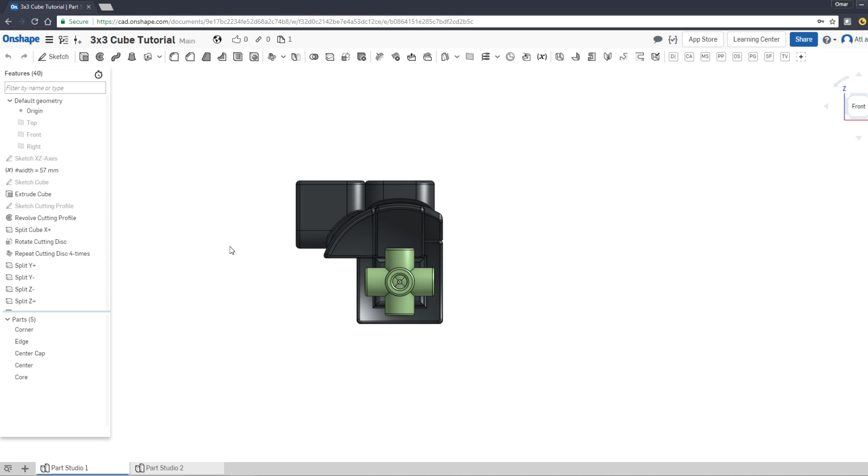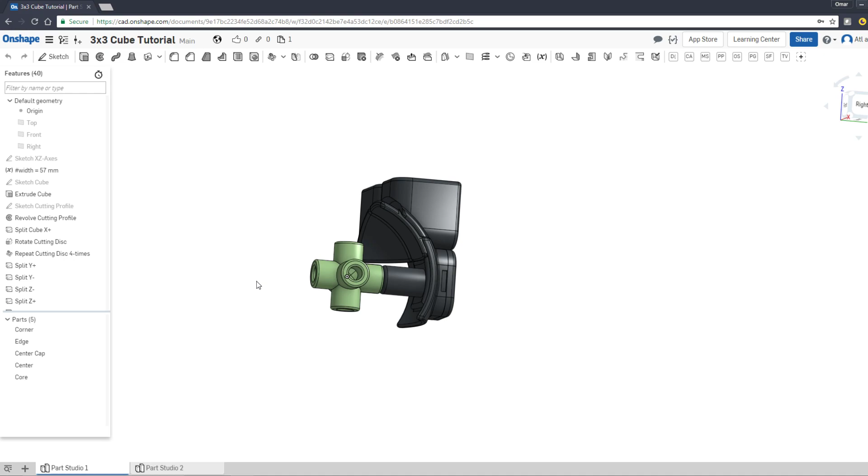The reason I chose this topic this week is because we spent a lot of time talking about Megaminx and Starminx and other dodecahedral type puzzles, and I thought this would be a nice change for this weekend to circle back to 3x3 and talk about this a little more. Then we can always go back and talk about Starminx and other dodecahedral puzzles in future videos.

So in this series, I want to talk about how you can make your own, for example, Fisher cube, or what's called a windmill cube, and so on. Or actually any design of your choosing. You can make a truly unique puzzle that nobody has made before.

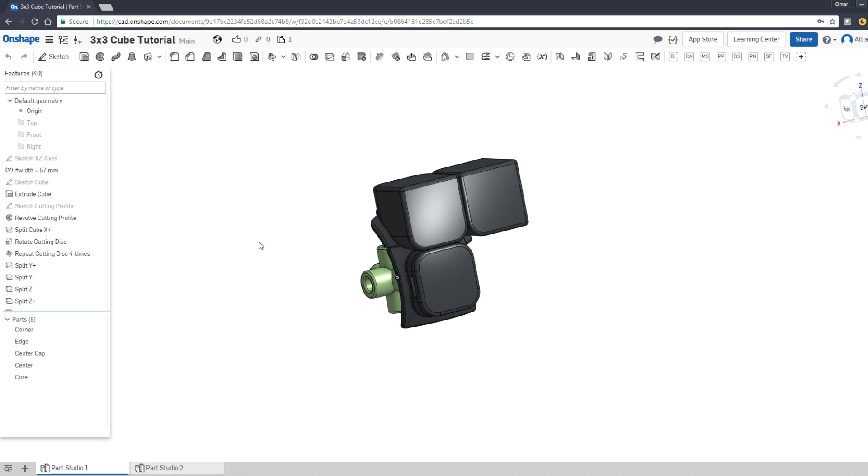It's the same approach, just how the degrees and angles in which you vary the cube differ. So what I want to start with here, I went back to a document I made called 3x3 Cube Tutorial, and this is what we ended up with last time we made the 3x3 tutorial series. There are a few things I'm going to modify in this document, and you can follow along and make those modifications, or I'll make this document available so you can skip those steps, and we can go from there.

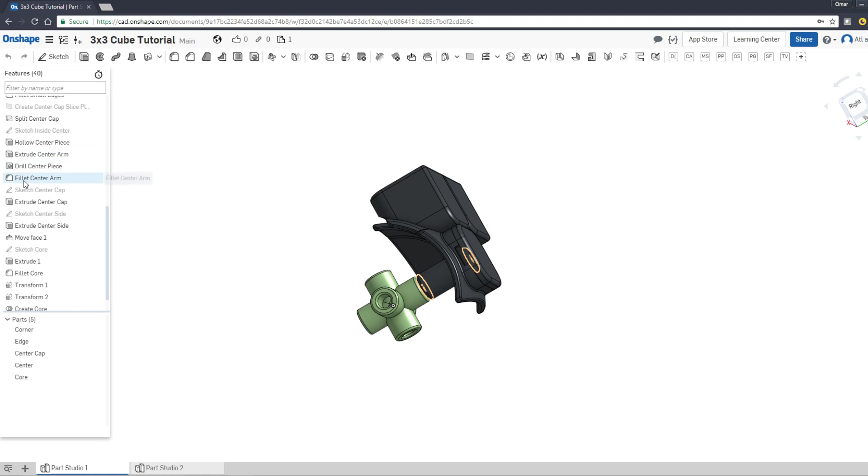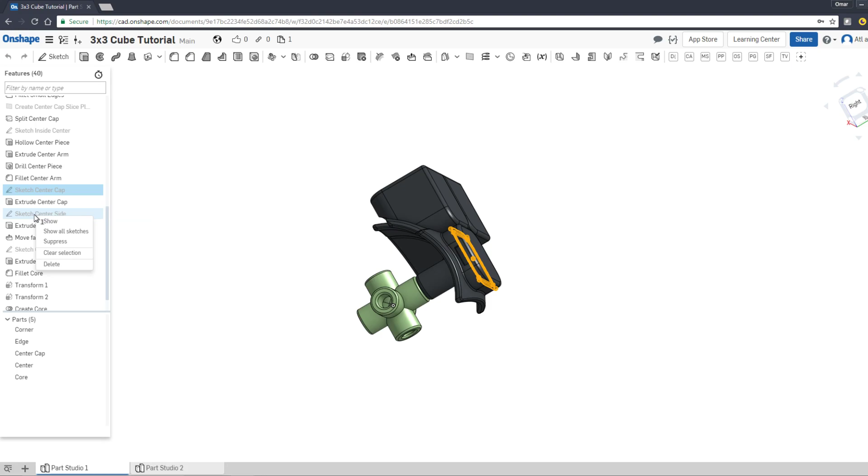At this point we made a sketch here to slice the center cap, and I think we will leave the center cap for now, but I'm not sure about the filleting or this side piece, for example. So I'm going to roll the design back to this point.

Right click and do roll to here. You'll see that the core is gone, which is fine, we don't need the core. You can make your own core, and I'm going to skip all these parts.

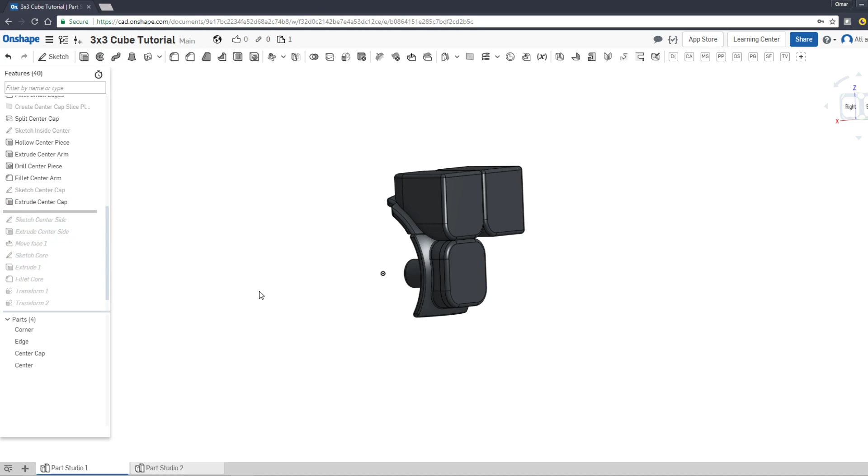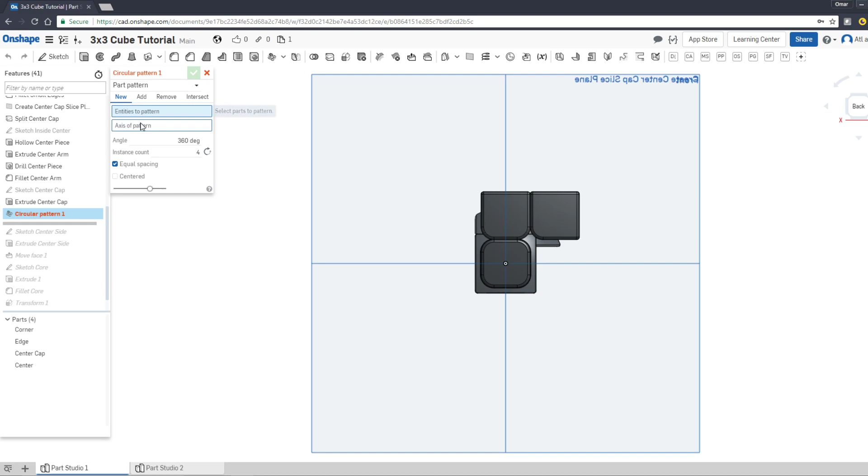The next thing I want to do to prep this document is show the axis, the different planes here. Let's click on circular pattern. Keep this at part pattern, and let's choose the corner and the edge.

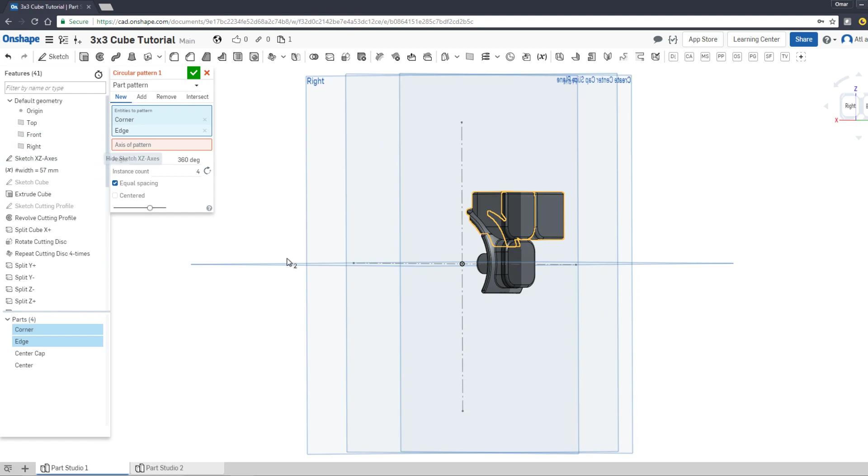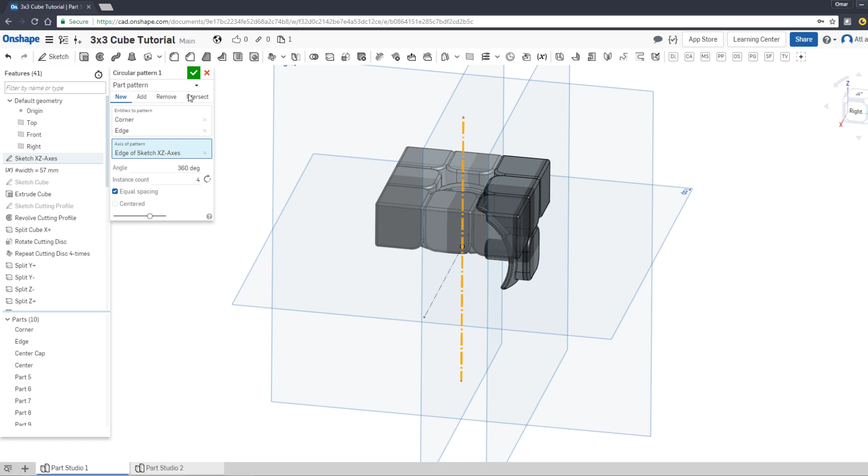For the sketch, I'm going to show my earlier XZ axis here, and let's do this Z-axis, and you'll see how it made this layer here, and do OK. So basically I rotated the corner and the edge around the Z-axis, and it gave me a layer.

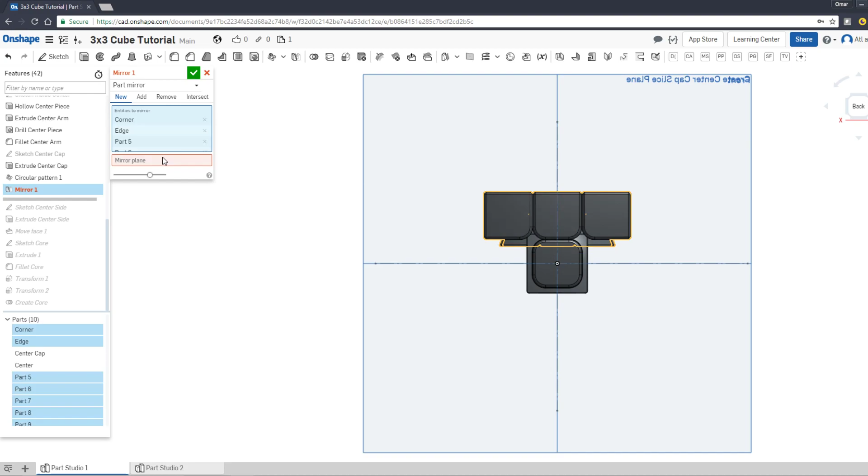Now I'm going to click on mirror, and choose entities to mirror. I'm going to draw a rectangle around these parts at the top, and for the mirror plane I'll choose the top plane, and it should copy them. So now we have that.

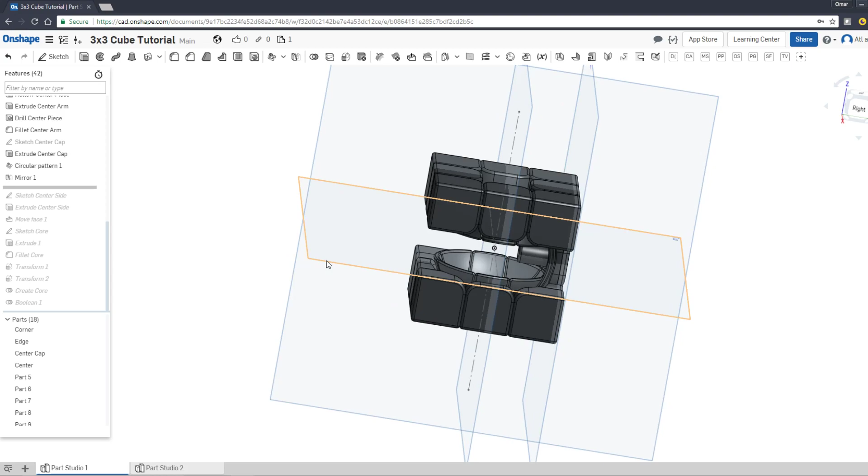Yeah, I don't know, it's very slow today, my computer that is.

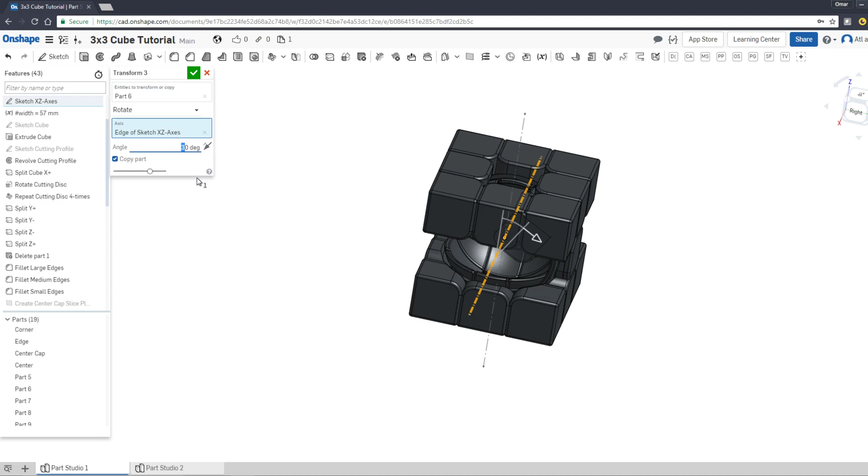Okay, so for the last few things, I'm going to choose this edge, do transform here, copy part, rotate around this axis, and do 90 degrees. There's probably an easier way to do this, we could do another circular pattern and just delete remaining parts, but anyways, I rotated this once here by copying it.

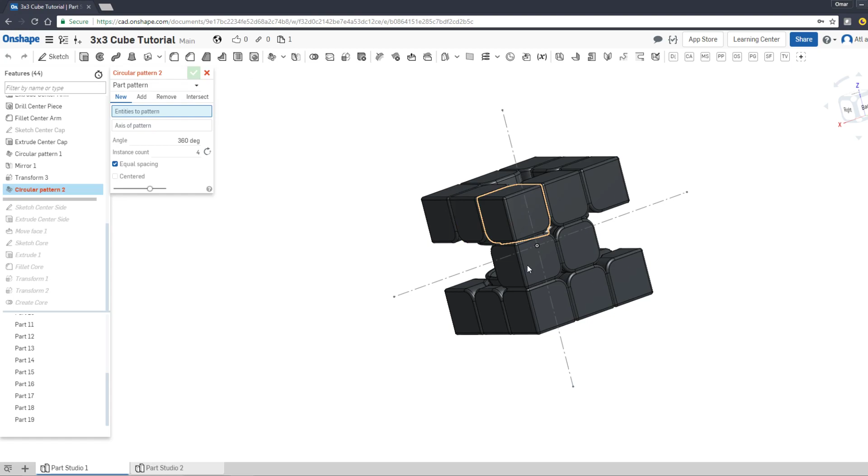I'll choose a circular pattern again, choose this edge and this center cap and the center as well, don't forget the center. For the axis, I'll use this axis, 4 times, and do OK. Oh, I forgot 2 centers. Okay, let's see.

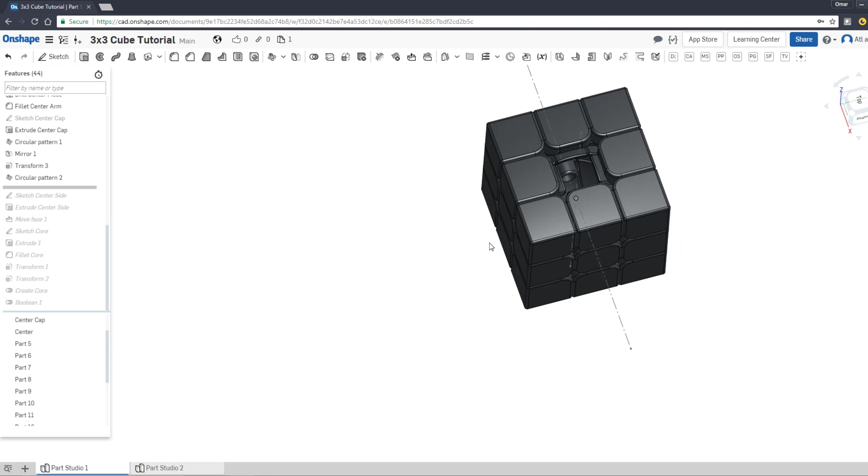Okay, I need to rotate this center again. Yeah, sorry, let me hide these 2 parts.

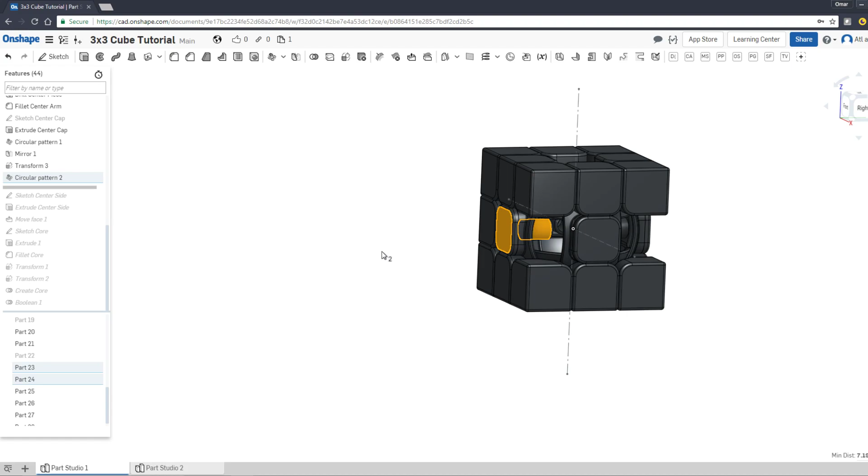Okay, so I'm going to copy this edge, this center cap, and this center, and I'll do copy, transform, copy by rotation, and for the axis, I'll choose this axis and 90 degrees, and do OK.

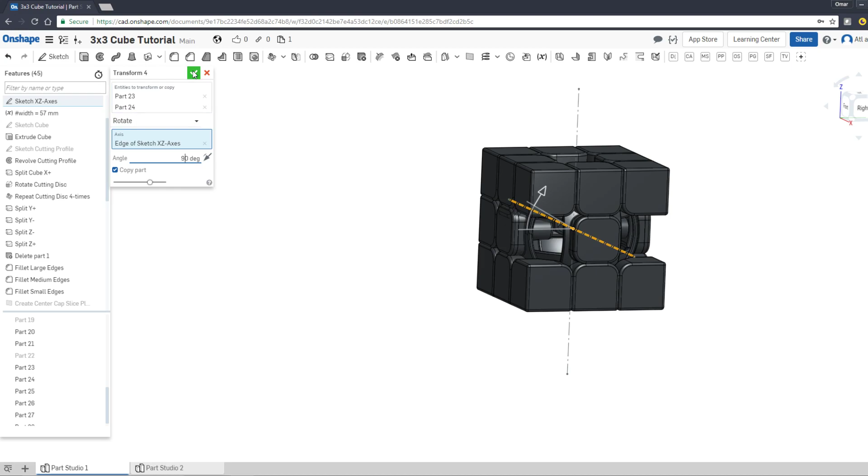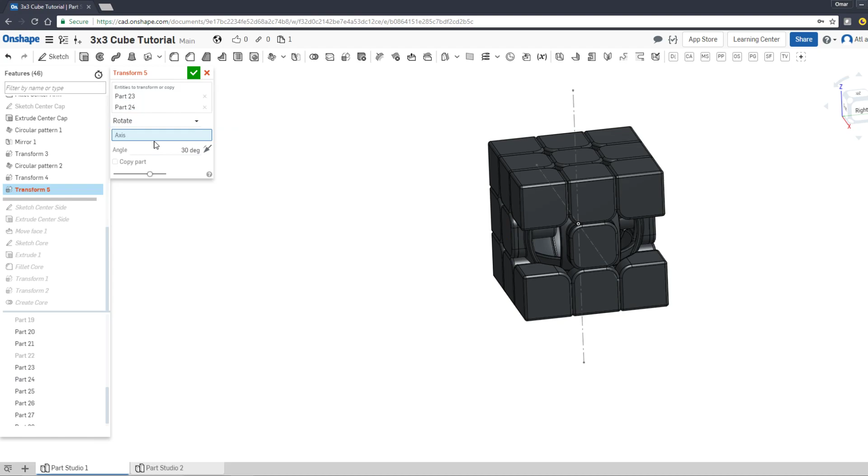Now we have a copy at the top, so I can mirror this. Or let's do it again, actually I'm just going to do the same thing: transform this center cap and this center by rotation along the same axis, again by 90 degrees, same thing.

The only difference now is I'm going to check this and reverse the direction, and do OK. Perhaps there are better ways to do this, but I guess this is okay for now.

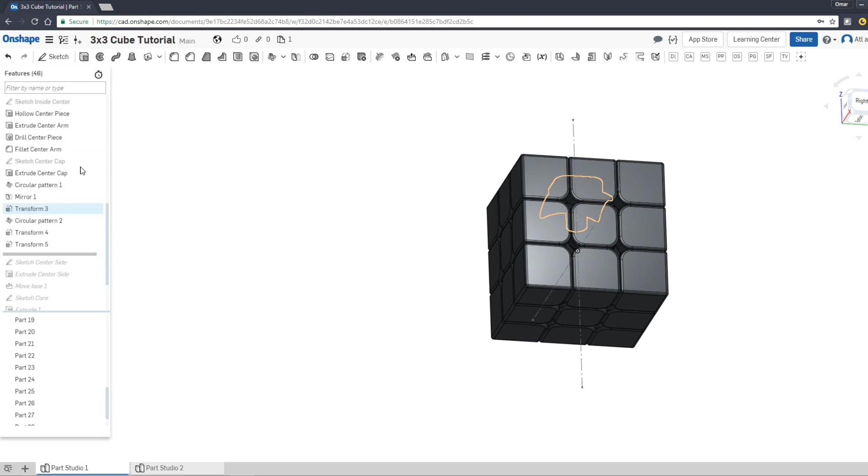Typically, when you make a plain 3x3, you delete all parts except for one edge, one corner, one center cap, and a core. You basically keep a single copy of every unique part. But for shape mods, you need to replicate every piece to have a complete looking cube like this.

Okay, so here it is. And actually, I should have made a copy of this document before I made those changes. So let's do that now.

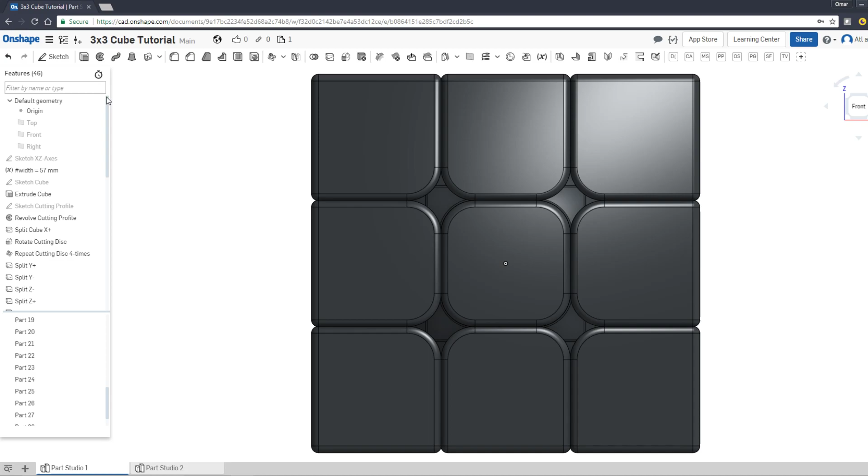I'll do copy workspace and name it 3x3 Shape Modification Tutorial, so you can search for this document, find it on Onshape and reference it. I'll work with this document from now on.

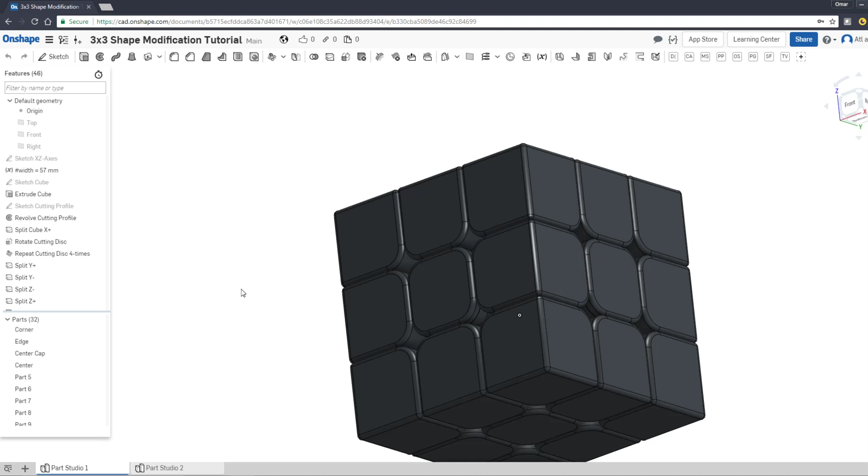Okay, so this is going to be part 1 for this series, which is basically prepping the document and making a copy of it. In part 2, we'll actually start with the shape mod. Okay, thank you, and I'll see you in part 2.